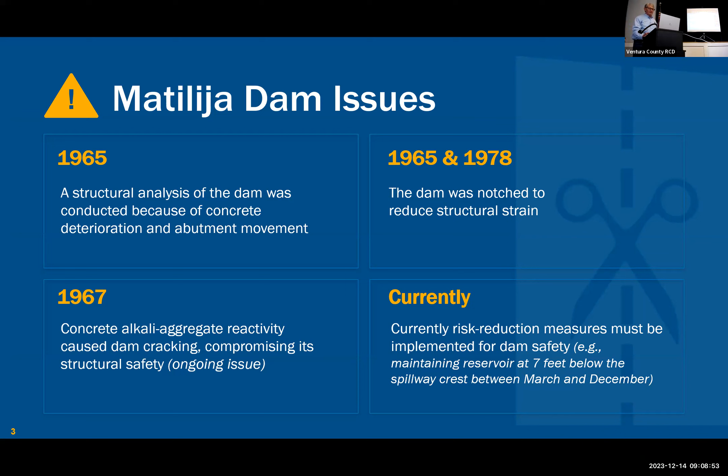The dam is under the State Division of Safety of Dams. They inspect it once a year. We do surveys there twice a year, and our consultants have done an analysis. It now operates under a restriction to keep the water level 7 feet below the crest between March and December.

In 1997, the steelhead was designated as an endangered species. In 1999, the Ventura County Board of Supervisors passed a resolution supporting the removal of Matilija Dam. From 2001 to 2004, there was a feasibility study completed with the Army Corps of Engineers. Pam told me just this morning, December 14th, 19 years ago today, was when the Board of Supervisors approved alternative 4B from the feasibility study.

There were some issues with fine sediment, which through work by a technical advisory group and a design oversight group, they were able to come up with a solution for. In 2017, things restarted with a grant from California Department of Fish and Wildlife to start the implementation design.

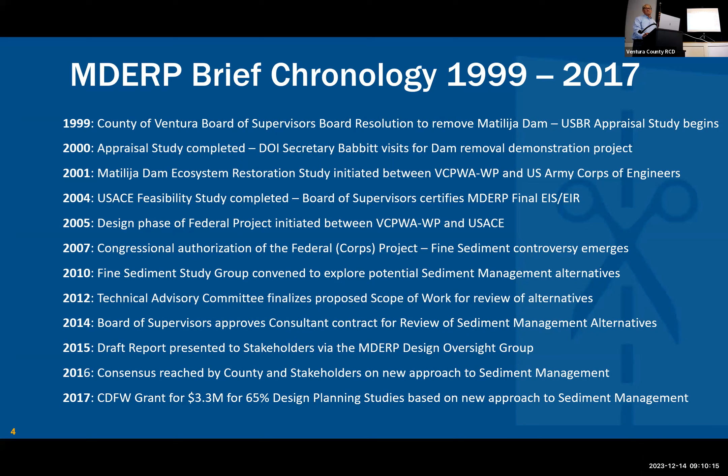The 2004 feasibility study identified some projects that need to be completed before the dam is removed, including infrastructure. I'll go through them here on the chart, shown in rust color on the screen.

Projects that have been completed include acquisition of the Matilija Hot Springs, Old Baldwin Road trailhead construction, Foster Park wells, and construction of the Santa Ana Boulevard Bridge, which is the most recent project completed. Since 2007, we've been doing habitat restoration, both ourselves and other organizations throughout the watershed.

The projects that remain to be completed before the dam can be removed are improvements at the Robles water diversion, replacement of the Camino Cielo bridge crossing, flood improvements at Meiners Oaks, and levee rehabilitation at the Live Oak Acres and Casitas Springs levees. Those all have to be done prior to dam removal.

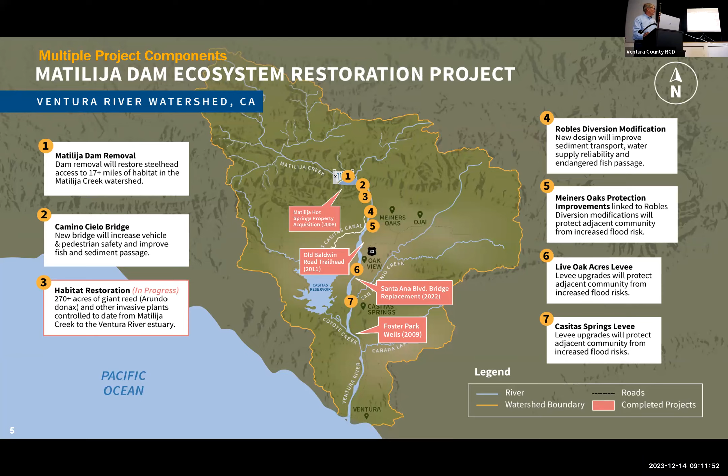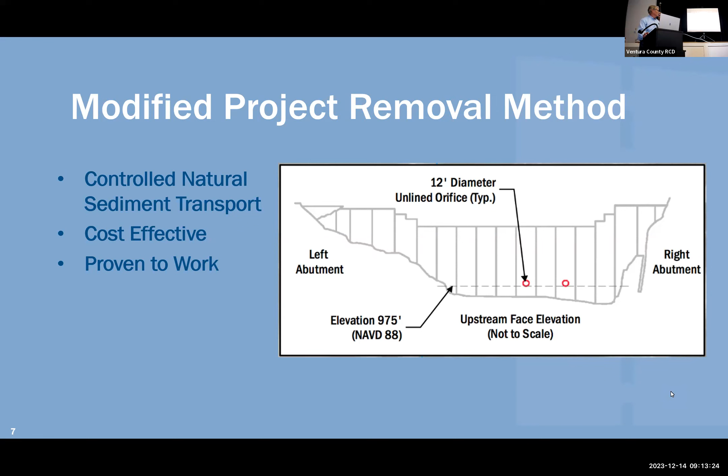I'm going to show you some of this: the tunnels or orifices that go through the base of the dam. They can be placed with or without gates. What's shown here is a tunnel with a plug of concrete left at the end.

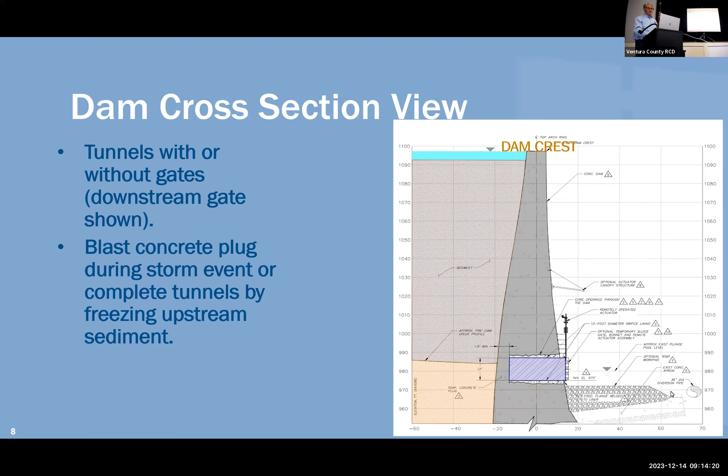This is similar to what's been done on other dams and is being done on dams under removal today. Within 3 days of a forecast qualifying storm event, charges will be placed to do a controlled blast of the concrete plug. The Condit Dam was done this way, and there are videos you can look at on YouTube.

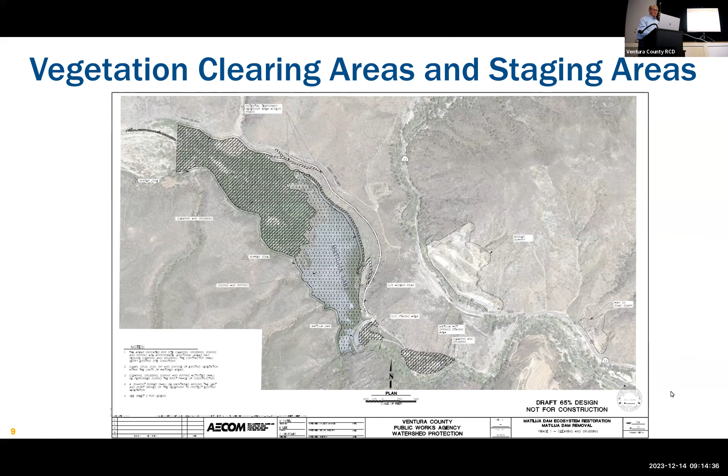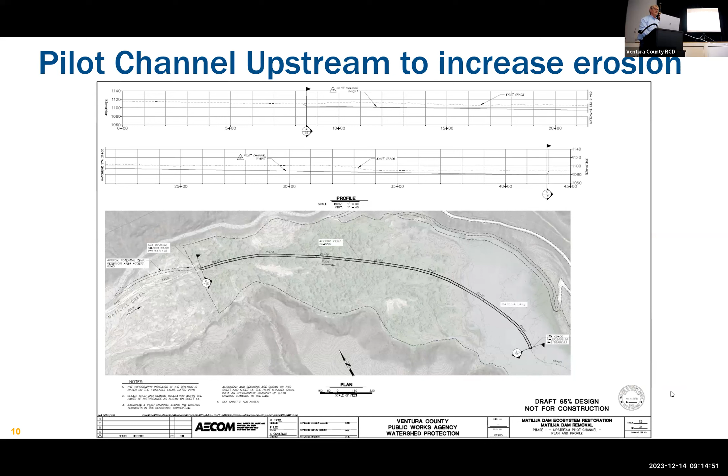Also, preparation before dam removal includes vegetation clearing in the former reservoir area, and construction of a pilot channel through the reservoir to encourage flow to the orifices and increase fine sediment transport.

They talk about a qualifying storm event before the orifices are opened. A qualifying storm event is defined as having recorded 15 inches of rainfall in the upper watershed, with a storm forecast to occur within 3 days that will exceed 1,700 cubic feet per second flow rate—a cubic foot is about the size of a basketball—for a period of 24 hours, to flush the major portion of the fine sediments out to the ocean in a single event.

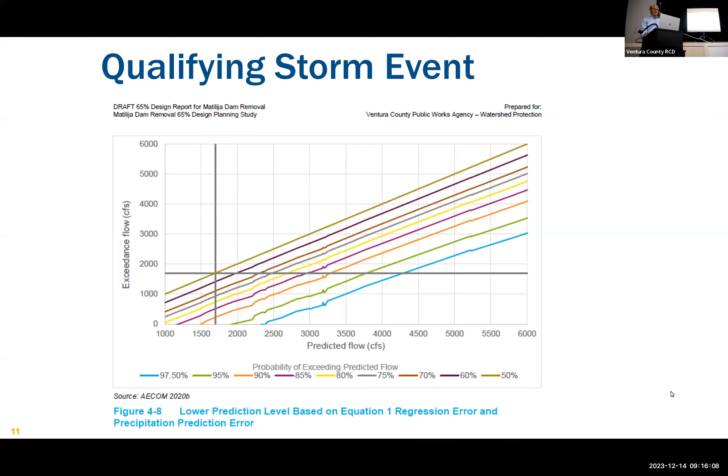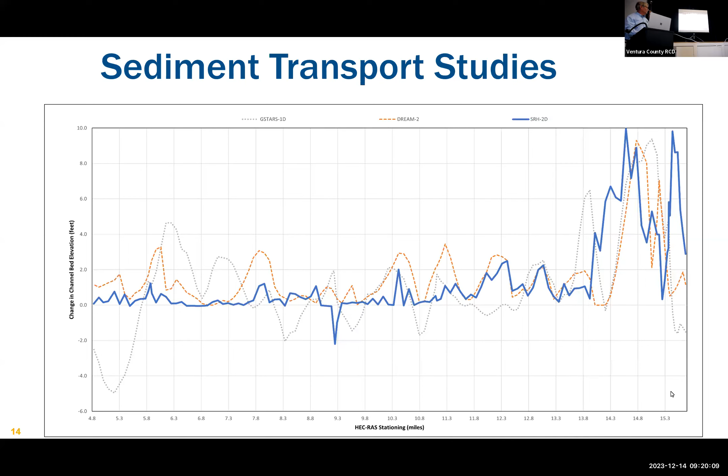There has been some progress on project design. They're looking at 30% design of the orifices. The orifices were originally anticipated to go perpendicular to the axis of the dam to minimize the amount of concrete removed. They modeled this, and it showed high velocity impact on the left bank. So as part of their study, they wanted to look at altering the angle of the orifices. Now they're skewed through the dam rather than perpendicular, and that did improve the flow.

Now I'm going through the component projects from Matilija Dam downstream that need to be completed. The first downstream is the Camino Cielo road crossing. We have secured funding for both final design and CEQA from the Wildlife Conservation Board and State Conservation, the Coastal Conservancy. Thank you, Pam. So to complete that work, but as I mentioned earlier, there's some ongoing sediment analysis to be concluded before the consultant starts their final design on that.

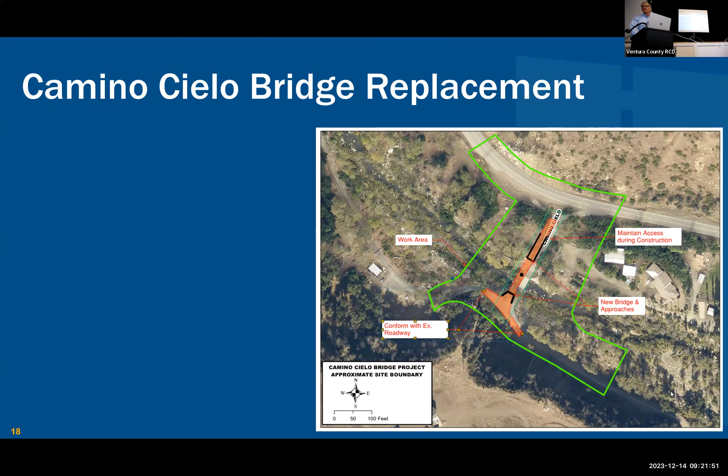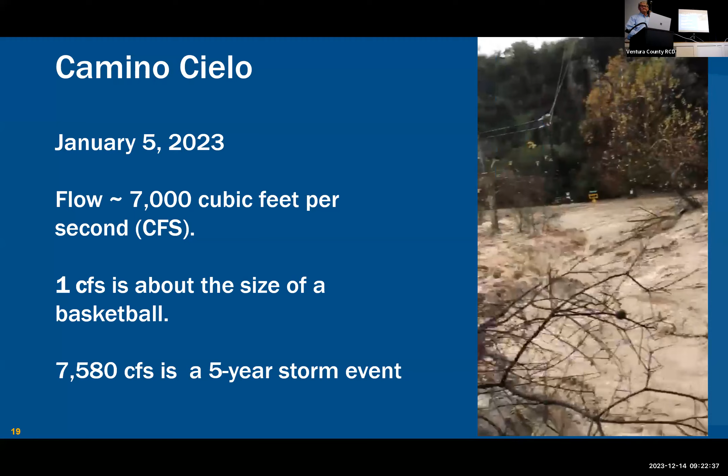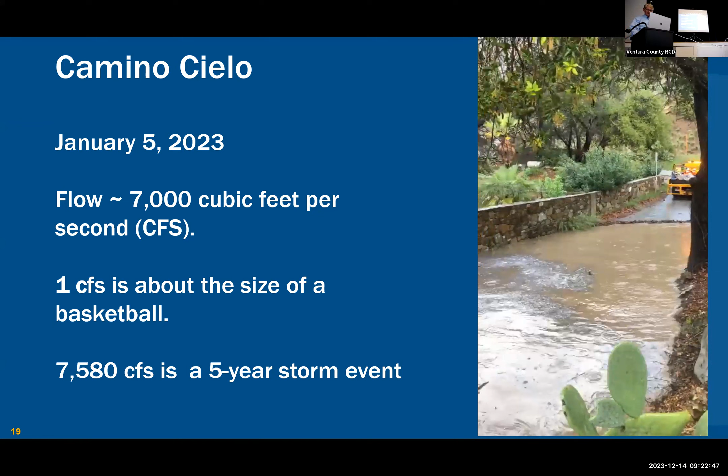This was taken by a member of the Roads and Transportation Department. That was about a 5-year event. This is the first repair—there's more than one repair done at this crossing this past year.

The next project area downstream is the Robles diversion, which includes the diversion and the community of Meiners Oaks. There's quite a bit of effort going into the preliminary design on Robles and Meiners Oaks. Primarily, the Robles diversion needs to be something that Casitas Municipal Water District can support and is excited about. They need to be on board that this project design is going to address sediment problems through the reach, and at the same time, there are regulatory agencies that need to be satisfied. Both groups are involved in the design process, and depending on what occurs there, it affects the Meiners Oaks flood protection.

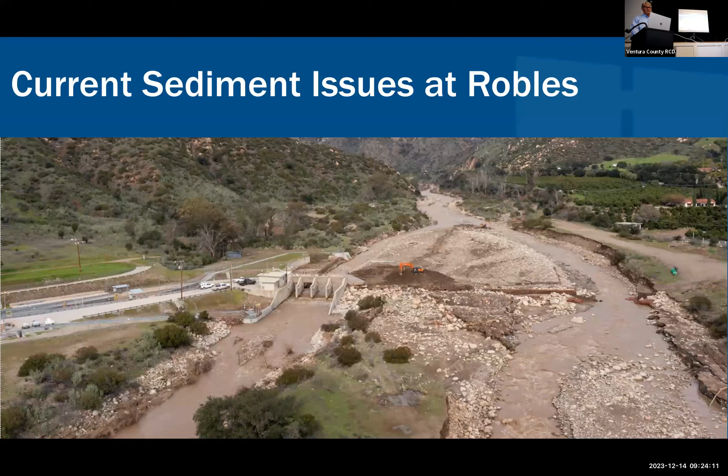These are both shown together under one slide. There are current sediment issues at Robles, which include sedimentation in the forebay, sedimentation in the canal, as well as clogged fish screens and potential fish passage barriers occurring. So keeping the diversion flowing and functional is also important to fish passage.

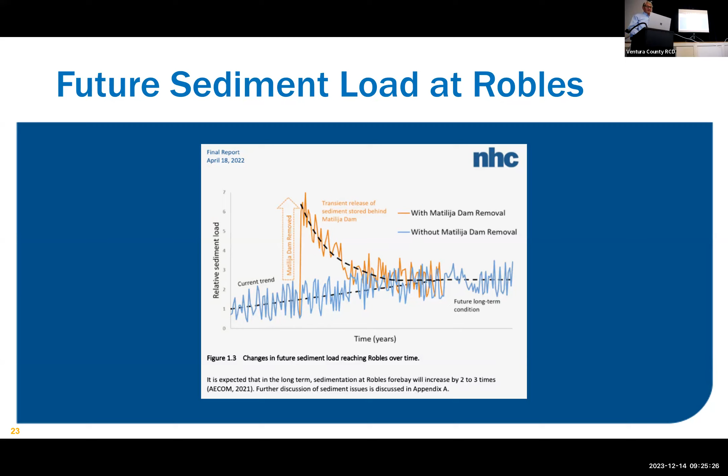This is just to show there is progress, and we're moving ahead on the Robles preliminary design. We are looking at wrapping up the first phase of the preliminary design by next October, and then moving forward with the 30% design the following year.

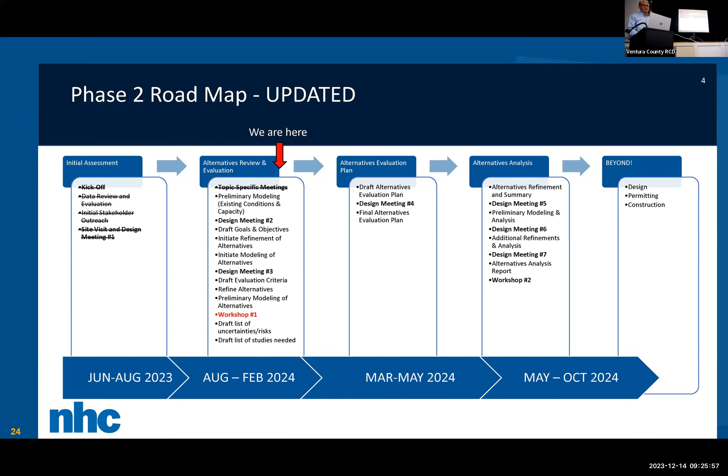There's also some levee rehabilitation projects at Live Oak Acres and Casitas Springs.

Just to back up to Robles for a minute, funding has been secured for the preliminary design and early CEQA work for Robles from the State Coastal Conservancy and California Department of Fish and Wildlife. In addition, funding for design and CEQA has been secured from California Department of Fish and Wildlife and Wildlife Conservation Board for the Meiners Oaks flood improvement.

For the levees at Casitas Springs and Live Oak Acres, the funding is from the Wildlife Conservation Board grant. Live Oak Acres is under design now. The consultant came out on December 5th for interior drainage analysis and review. They took some samples from the stream bed and are working on the FEMA hydraulic analysis. They'll also need the final sediment analysis completed before they can move forward and complete their design. For Casitas Springs, the consultant has been selected, and I think the contract is scheduled to be awarded this spring.

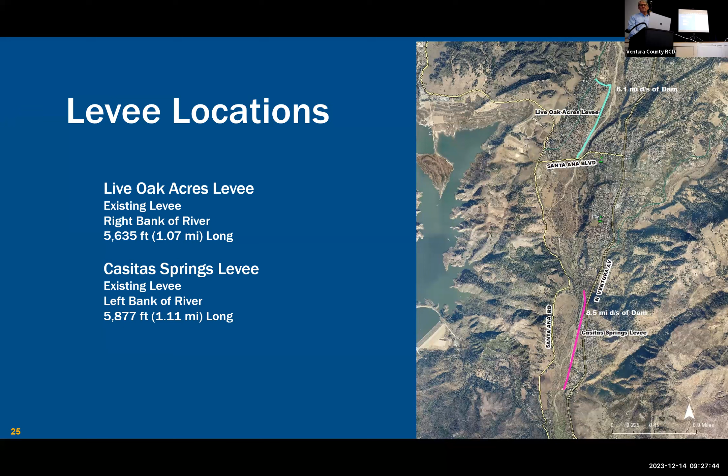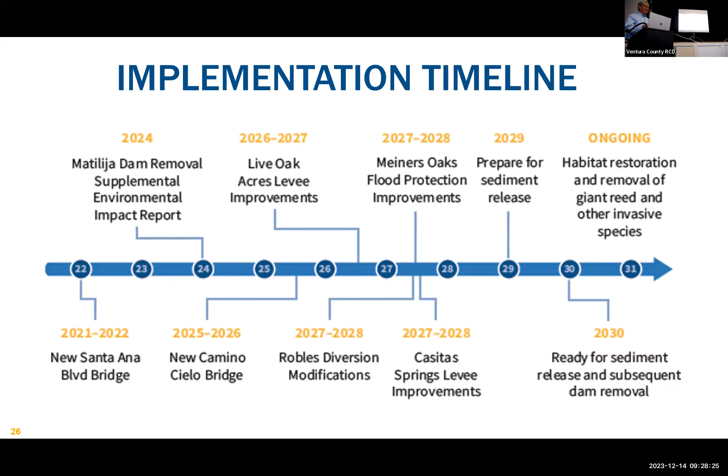So with that, we come to the implementation timeline. We're basically wrapping up '23, so we're in the supplemental environmental impact report phase, as well as looking towards moving ahead with the final design for Camino Cielo Bridge and Live Oak Acres in the near term, followed by the roadways diversion and Meiners Oaks improvements. After that, the tunnels get placed along with the pilot channel, and we're ready for the qualifying event that we spoke about earlier.

Excuse me. So I ran out of... I'm gonna have to.

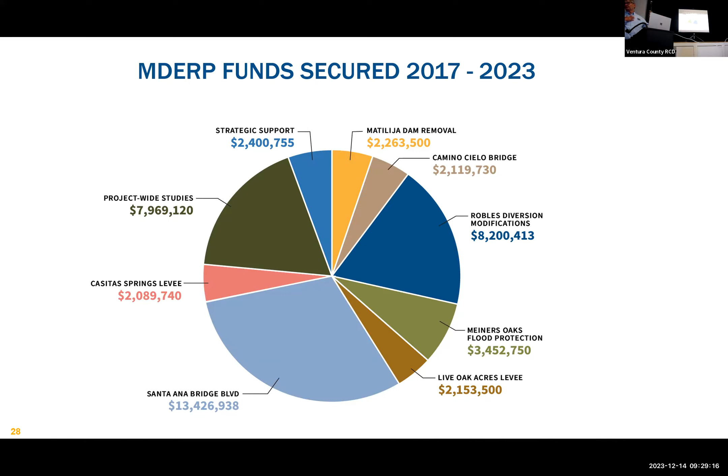Funding. It's over $44 million in funding that's been obtained since 2017. That's what this chart represents.

And that's in large part thanks to our RLF consultant, David Yardas, who not only helps secure grants but does a lot of other related work to keep the project on target.

So this is what we need to get us to 2030 with the orifice installation, and then beyond 2030.

So with that, let's see, Donna, do you want to come talk about the sequence slides? Would you mind advancing the slides for me? Yeah, I'd be happy to.

Currently, we're in the process of doing scoping for the subsequent EIR to the 2004 EIS-EIR for the dam removal component. The scoping process started on November 20th and ends on the 20th of December. We have some sheets back there that you can put your comments on if you'd like.

What that whole process is about is letting us know what issues you think should be addressed in the subsequent EIR, whether it's certain environmental impacts you're aware of that maybe we don't even know about, or mitigation measure concepts you have because you realize, okay, there's going to be a sediment impact, and you think this might work as an alternative. So all that information is what we're trying to get from you, and comments will be addressed in the environmental document. There'll be opportunities to have input later on at the draft phase also.

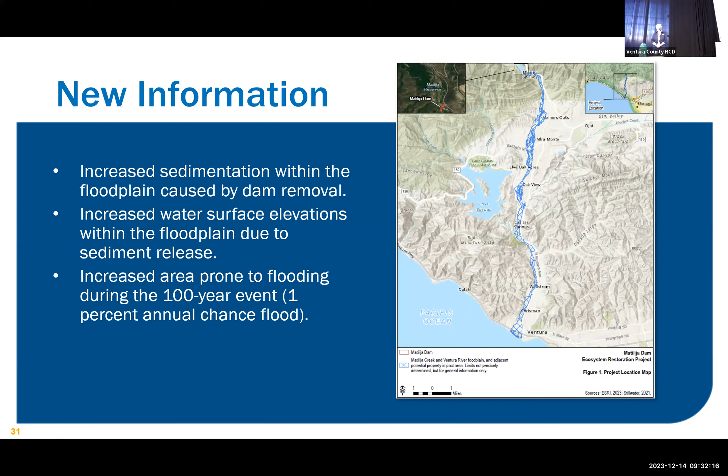And that's about it. So I think what do we have for the next one? I think it's questions.

Yep, and Kirk, I see a couple of people trying to see the screen from back here, and it's really tough for me. We'll make this slide deck available, right? Through the Ventura River Watershed Council, yeah, we'll share it with them. Everybody can get it. That's great. Yes, I noticed approximately $240 million for the project cost.

Is that in today's dollars or future dollars? That's in today's dollars. Okay, so over the next 7 years, we're talking about a $300 million project.

You secured 44 million of that, which is approximately 15% of the total funding required. What's the plan for funding? Where do you see the sources of funding coming from? And secondly, are there potentials that could slow down this project beyond the 2030 scope you're envisioning now?